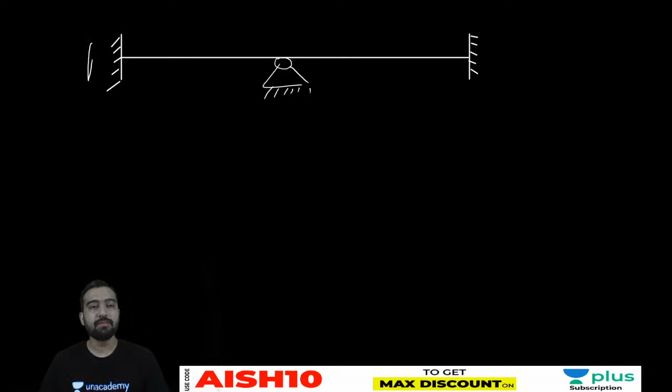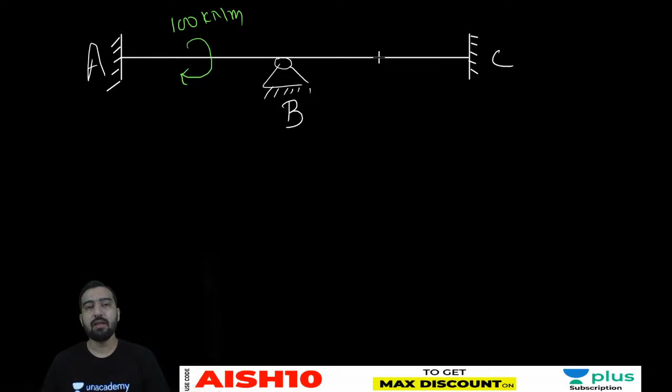Okay. A, B, C, and it is 100 kilonewton meter. It is acting at the center, and let's say it is... yes guys, one more thing.

Whenever I am giving you any problem, intentionally I am trying to take the easiest loading. Like you might have observed that I always put the load at the center, okay, UDL and entire span like that. But the fact is that in reality, in exams, such loading may not come. It may be UDL up to half span, it may be UVL and all.

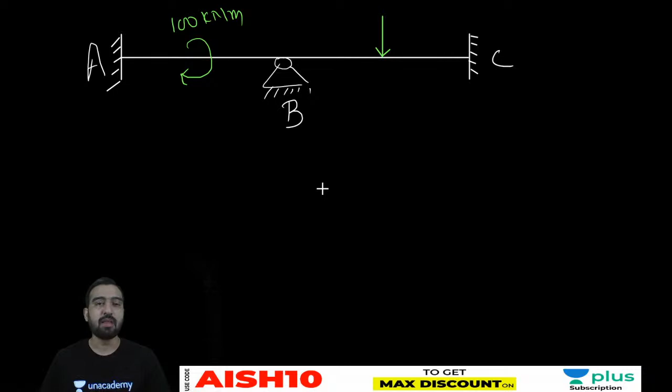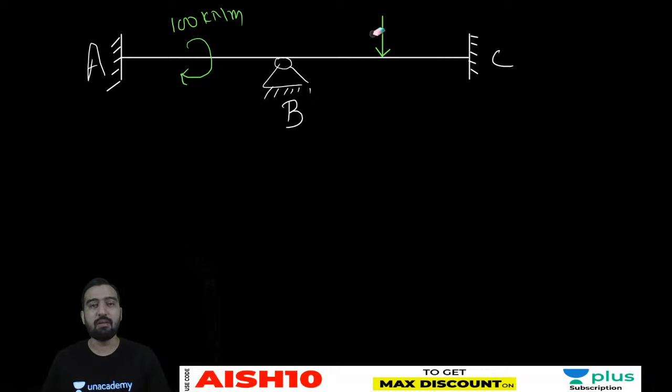But the impact of them is not going to create a problem, because whatever is the type of loading, based on that you can calculate the end moment. So my primary aim here is to deliver the concepts. That is why I am not emphasizing on load, because I know in the kinematic method, whatever loading you are applying, that can be easily tackled just by considering the fixed end moment due to that loading. And in the starting only, we have seen how to compute the fixed end moment for the various types of loading. So just to save your calculation time and all, I'm keeping the load simple.

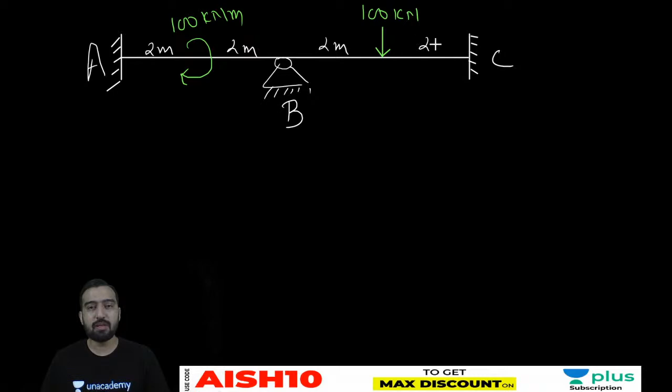So it is 2 meter, 2 meter, 2 meter, 2 meter. Let's say it is A, B, C, let's say it is D, let's say it is E. Okay, so these are the loadings. You have to analyze this beam.

And delta B is sinking by, let's say, 1 mm, and value of EI is, say, 48,000 kilonewton meter square. Okay, is it clear?

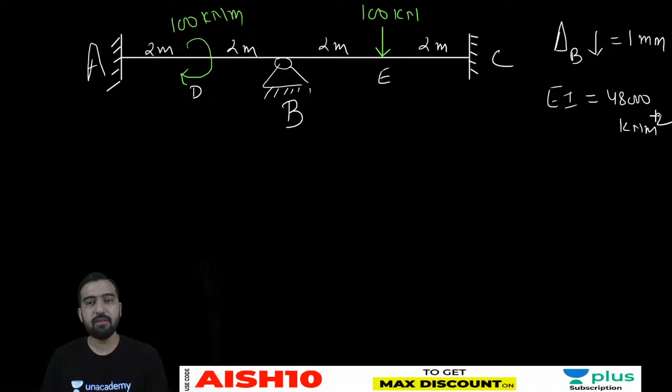So support B is sinking down, only support B is sinking down by 1 mm, and EI of the beam is given as 48,000 kilonewton meter square. Now you have to calculate the end moments, or draw the bending moment diagrams. Just give me the value of end moments. You can draw the bending moment diagram, I know, so just give me the value of end moments. What is MAB? What is MBA? What is MBC? And what is MCB? Is it okay? Please calculate this.

Okay, just let me check the 6 EI delta upon L square. Okay, all right. Yes, now calculate the value.

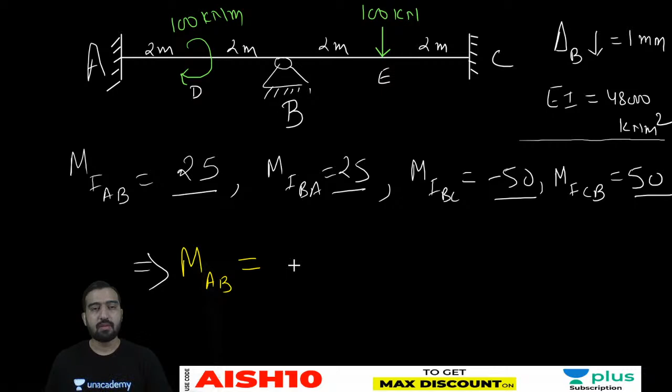my dear friends, let me tell you one thing very clearly. If you are able to write MAB, MBA, MBC and MCB properly, then nothing will be left in this question. Okay, my motive to give this question is only this, that how you can analyze this settlement, and are you able to decide the direction of the settlement, are you able to visualize the direction of the fixed end moment generated due to settlement. So this was my motto, okay, before giving this question.

So fixed end moment, will it not come due to delta? Yes, it will come, my dear friend, it will come. But this is the difference between the slope deflection method and the moment distribution method. You remember, in slope deflection method, the fixed end moment due to delta is to be considered separately. That is why the delta component is there, na, minus 3 delta by L or minus 6 EI delta by L square. You remember when we were deriving the slope deflection equation, first of all we only considered the effect of fixed end moment. After that we have seen the effect of rotation.

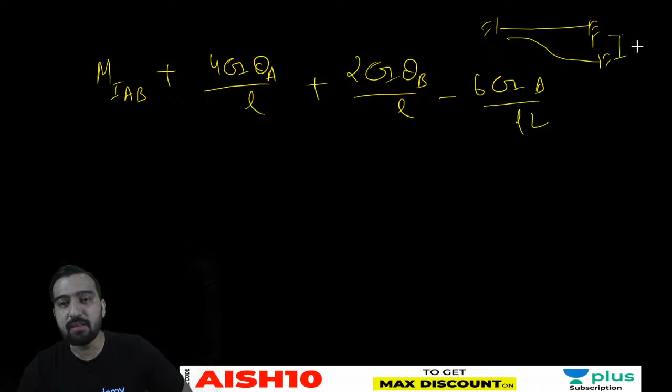After that we have seen effect of rotation at A only due to theta B, which was 2EI theta B by L. After that we have seen the effect of settlement delta, so minus 6EI delta upon L square. So here this settlement effect is being taken separately.

It is not to be merged with the fixed end moment. And if you guys think that you will be able to merge it with this, then you can do, no harm in that. But it will create problem while you will be analyzing sway problems and all. So you can merge it with him.

But if you want to write this general equation, that 2EI by L into 2 theta A plus theta B minus 3 delta by L. So this minus 3 delta by L into 2EI by L is nothing but the fixed end moment due to delta only.

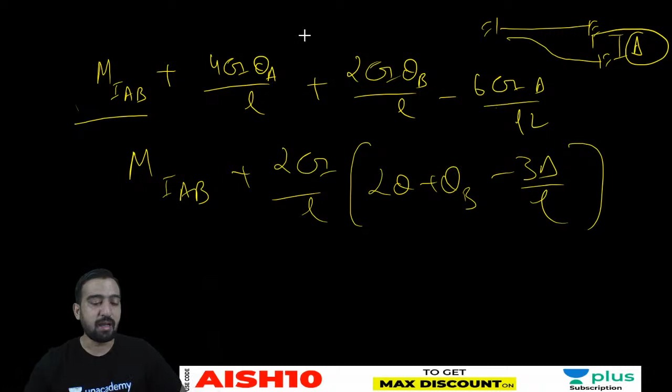Is it clear, Akash? So tell me, my dear friend, if it is clear or not. And see what is MAB. MAB will be equal to

25 plus 2EI by L, bracket: 2 theta A will not come, theta B will come, and 3 into delta by L.

My dear friends, tell me the direction of this term. Will it be positive or negative? Tell me which is right, all of you. I want to write MAB, and I am asking you which sign is to be considered here, positive or negative. Please answer me fast, I hope you got my question.

Positive, Mahima is saying positive, DK is saying positive. Akash is also saying positive. Mukesh is saying negative. I don't know why majority of you are saying it positive.

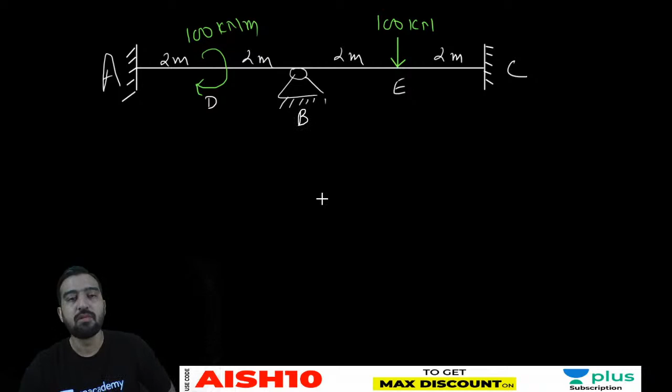Okay, now MAB is done. It is 25 plus 2EI by L, bracket theta B minus 3 delta by L. Now, my dear friend, tell me about MBA. It is MF.

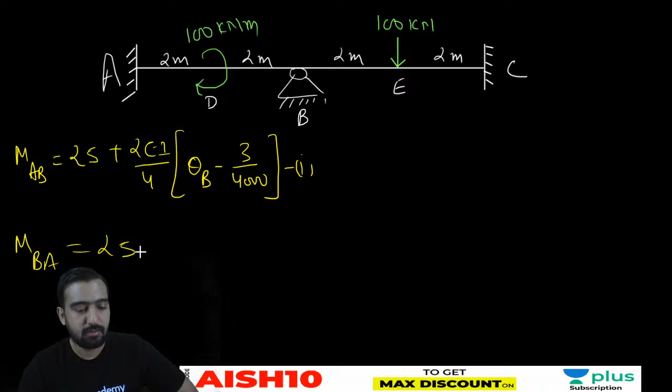No, Mukesh, final answer is not correct. Will it be negative or plus? Tell me. Will it be negative or plus?

Negative. Okay, good. Now, listen.

MBC equals minus 50 plus 2EI by L, 2 theta B, theta C will be 0. Will it be plus or minus 3 delta by L? Tell me. Plus or minus? Tell me. Fast.

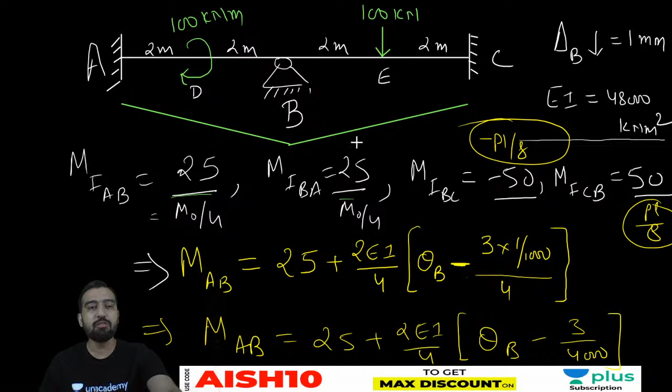Okay, MCB, how much will it become? 50 plus 2EI by L.

Now tell me, positive or negative? Theta B, minus or plus? Tell me.

So it will be, yes, positive. It will be positive. Okay. So MAB, MBA, MBC, MCB all are available here.

Yes. And what is the joint equilibrium condition? Joint equilibrium condition is that MBA plus MBC is equal to 0.

In actual conditions, only one unknown is here, theta B. Once the value of theta B is known to you, after that you can easily compute the value of MAB, MBA, MBC and MCB. Tell me, my dear friends, first, what is the value of theta B? Okay. And after that, the value of end moments.

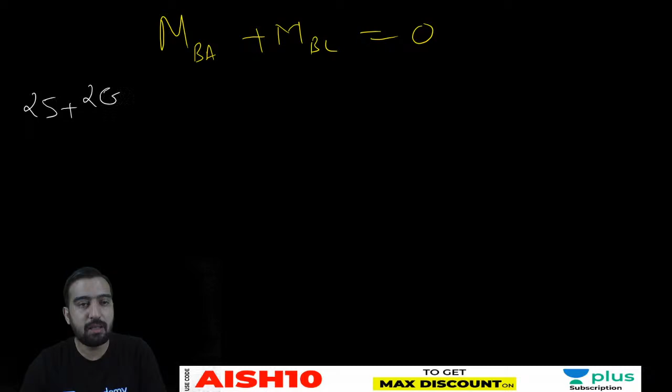So let me write the main equation, MBA plus MBC equals 0. So what is MBA? 25 plus 2EI by L bracket 2 theta B minus 3 delta by L.

1 by 1000, plus MBC. What is MBC? Yeah, now you are right, Mukesh. Now you are right.

Minus 50 plus 3 delta by L is equal to 0.

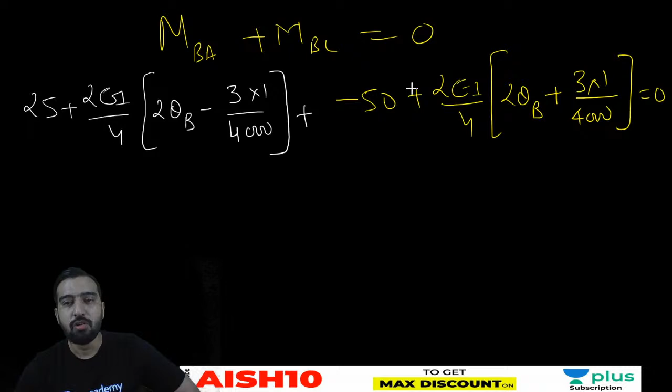So on solving this, you are getting theta B equals 12.5 upon EI. Okay, or you can even put the value of EI. It is given to you, it is 48,000, and on substituting the value of theta B and EI on these equations, you will be getting the final answer.

So it will be how much? 19.5, minus 19.5, sorry, it would be 19.5, it would be minus 19.5. Okay,

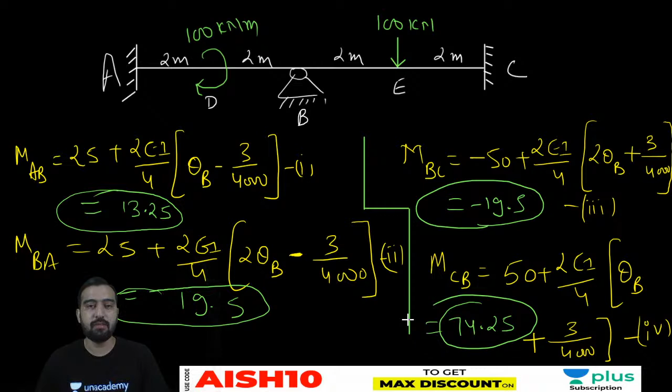Is it okay? So my dear friend, if you listen to this, okay, understand this, then I hope the effect of delta should not be there. Delta is not going to trouble you. Is it clear to all my dear friends?

Tell me. Please ask any doubt if you have any. Please ask the doubt if you have any. Okay. Is it clear to all? Tell me if you are having any doubt. Clear. Okay. Okay.

Sir, how do you calculate the value of MAB, MBA without the value of EI? Shashank, whenever there will be a problem on settlement, meaning where the value of settlement is known to you, in that case EI value you will be needing.

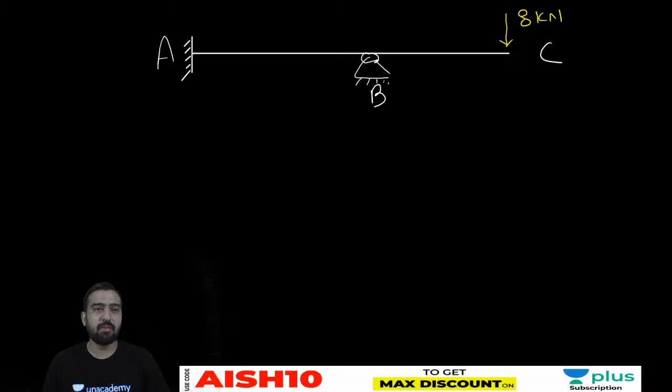Okay, so here E is 200 GPa, I is 5 into 10 raised to the power 6 mm4, and here the support B is sinking by 80 mm.

It is sinking by 80 mm, so it is the input. And you have to calculate the moment at A. Please use slope deflection method only. Is it clear to all?

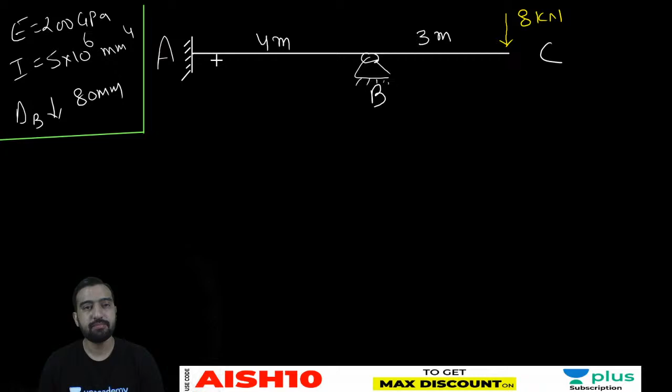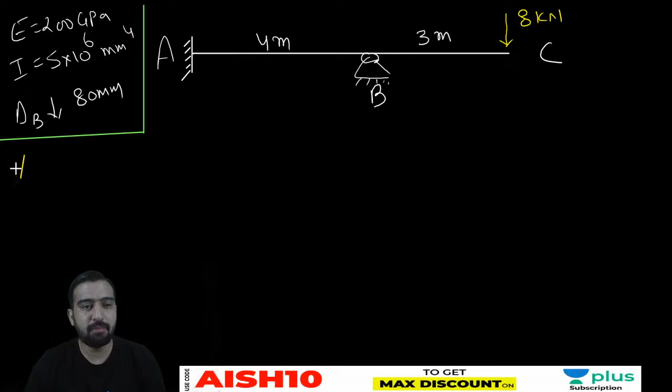Okay, don't plot BMD, SFD and all. Simply give me the value of MAB. But yes, you have to use slope deflection method only. You have to use slope deflection method only.

Okay, good, Shashi. Shashi is Sushma. No, Vivek. No. And Shashi, also give me the direction - is it clockwise or anti-clockwise? Also give me the direction.

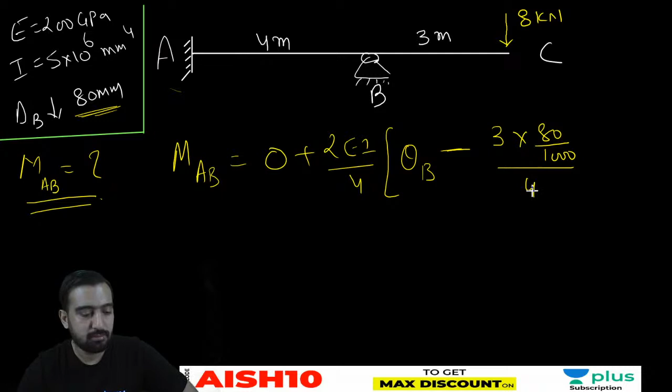What is MBC? Don't have to think, it is simply minus 24, isn't it? It is simply minus 24 because 8 into 3, so MBC will be anti-clockwise 24 - anti-clockwise I am representing with the negative sign. So no need to write theta, delta and all, it is an open beam. So directly you will be able to calculate the end moment at support B on the right hand side.

And from joint equilibrium condition, my dear friends, we all know that net moment at B is equal to 0. So it means MBA plus MBC is equal to 0. So what is MBA? MBA I can write as 2EI by L, 2 theta B minus 3 into 80 by 4000.

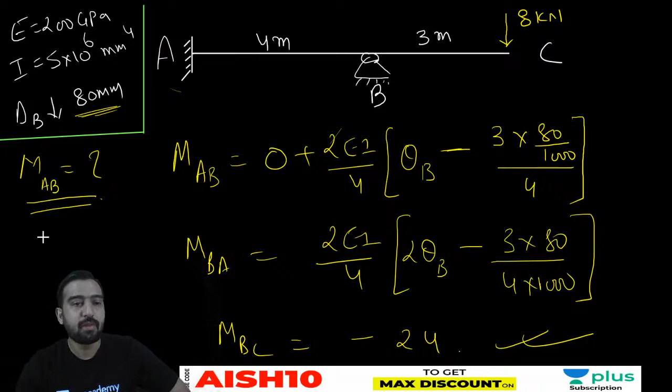Okay, first of all calculate the value of MBA. EI, what is EI? EI is 200 into 10 raised to the power 9 Newton per meter square.

Okay, or what can I do - it is nothing but 2 into 10 raised to the power 5 Newton per mm square, multiplied by 5 into 10 raised to the power 6 mm4. So what is this value? It is 10 into 10 raised to the power 11 Newton mm square.

So converting to kilonewton, dividing by 1000 three times. So it is only 1000, I think. Please check it - is it coming 1000 only?

Okay, Barvina, not an issue, thanks for the information. Today only I was thinking that now the live learners are going down. So I can understand the issue. But yes, if you have seen structures so far, then I will advise you to complete it. So anyhow, you can manage it and you can complete it. Good, thanks.

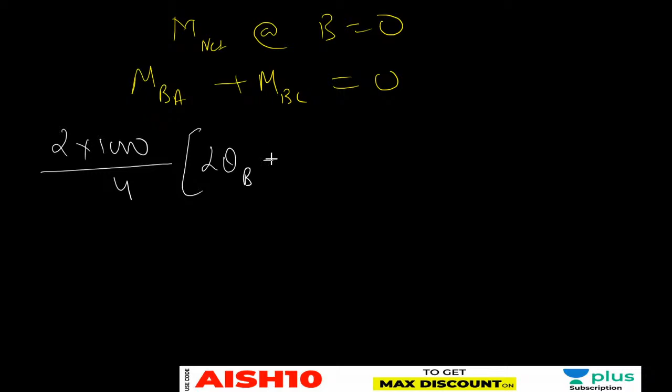2 theta B minus 3 into delta minus 24. Yes, now you can calculate the value of theta. So what is the value of theta? So 2 theta B is equal to 24 into 4 by 2000 plus 3 into 80 by 4000.

So just give me the value of theta B, my dear friends. What is theta B? What is theta B?

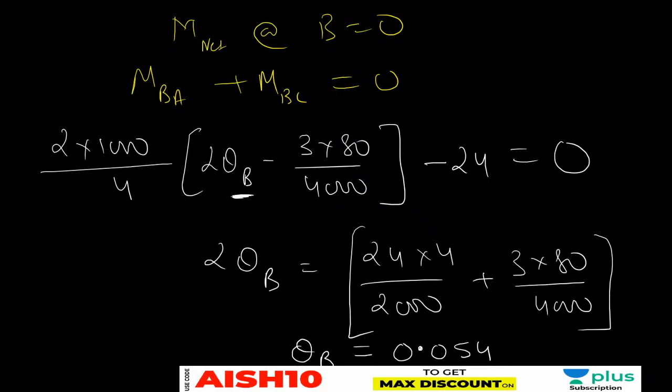But you are making use of this fact in order to find the value of this unknown value theta b. Okay, so MBA is 24, this we are knowing. So by knowing this information only, as you can see here, you are calculating the value of theta b. Is it clear to you, my dear friend? Okay.

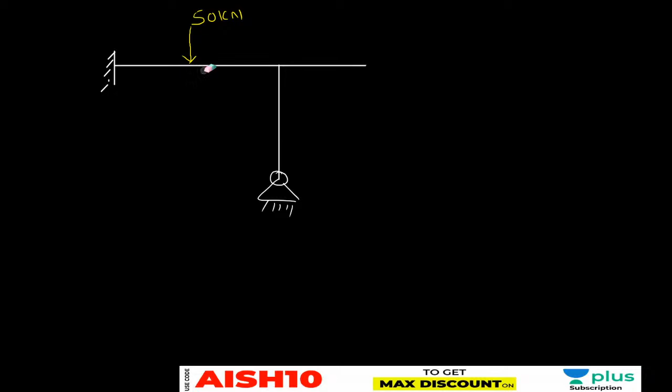Hmm, let's say it is 10.

So other than slope deflection equation, can we establish any relationship between moment at support A and support B? Not in this case, my dear friend, not in this case. Because here, due to the elastic curvature and all, you will not be able to find the exact relation between moment at A and moment at B. Okay, but yes, when we will be doing frames, then we will be able to maintain some relations. But that is also case specific, where loading should not be there, and the stiffness should be same. So after considering all those parameters you can make, but normally I will say no, don't try this.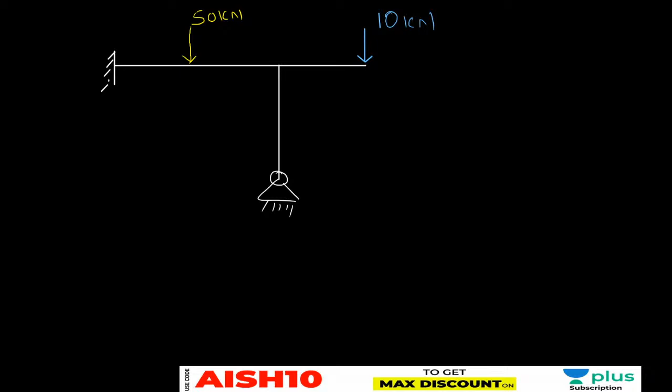Okay, but one thing is there, whenever we will be discussing a problem, then unknown variable will be increased by one more. So in that case, apart from joint equilibrium equation, you have to look for some additional compatibility conditions, and those additional compatibility conditions are shear equations, additional joint equations. That we will be seeing when I will discuss sway problems. Okay, so right now this is the loading.

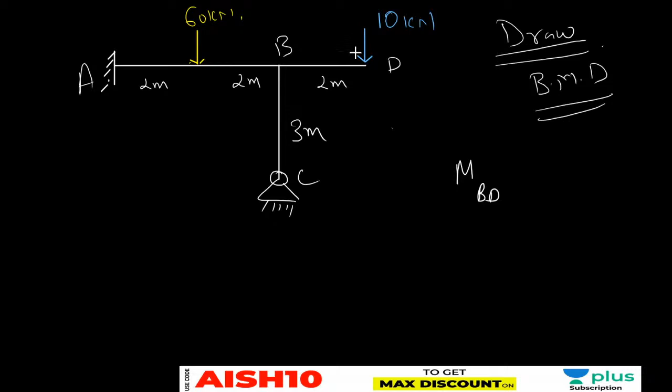MAB, MBA, MBD, MBC. Only one thing is known here, that MBD, it is sure 10 into 2, how much it is? Minus 20. This is known to me. What about MAB, MBA, MBC and MCB?

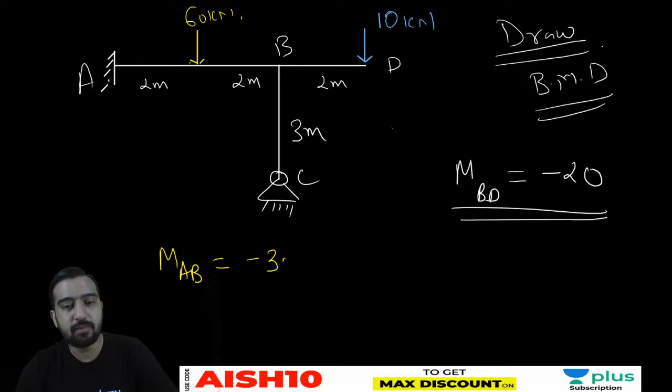See, MAB would be equal to how much? 2EI by L, sorry, PL by 8. So what is PL by 8? Minus 30. Now please don't ask how I got minus 30. PL by 8, 60 into 4 by 8. Okay, minus 30 plus 2EI by L, plus 2EI by L, bracket 2 theta A. Theta A is not required. So theta B, no delta is here. This is my equation number, relation number 1. Okay.

MBA, 30 plus 2EI by 4 bracket 2 theta B. Okay, this is the relation number 2. Now MBD you know already. So let me come for BC. MBC.

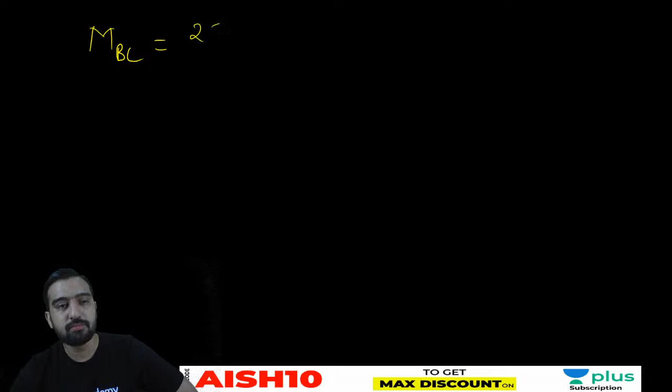So MBC would be how much? Yes, good. It is 2EI by L, bracket 2 theta B plus theta C. Isn't it? 2 theta B plus theta C.

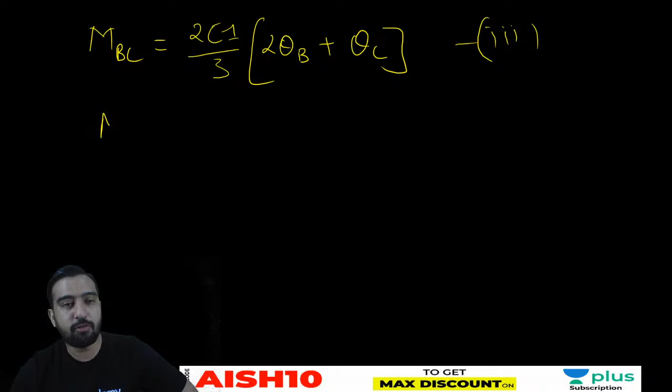Okay, so relation number 3. And relation number 4 is 2EI by L bracket theta B plus 2 theta C. This is my relation number 4.

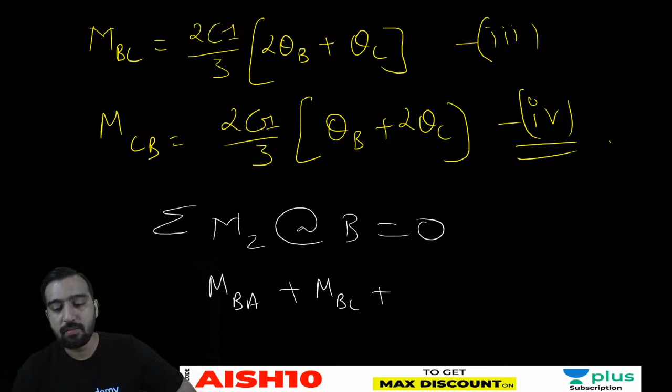Summation of Mz at joint B is equal to 0. It means MBA plus MBC plus MBD is equal to 0. Isn't it?

Not 2 pm, 3 pm. 3 pm there is a SOM class. Not class, it is a session on MSQ. It is the session on MSQ. Okay.

What I was telling you - yes, MBA plus MBC plus MBD is equal to 0. MBA plus MBC plus MBD is equal to 0. Okay.

So after that, solve this equation. So MBA is how much? 30 plus 2EI by 4 into 2 theta B. Okay, plus

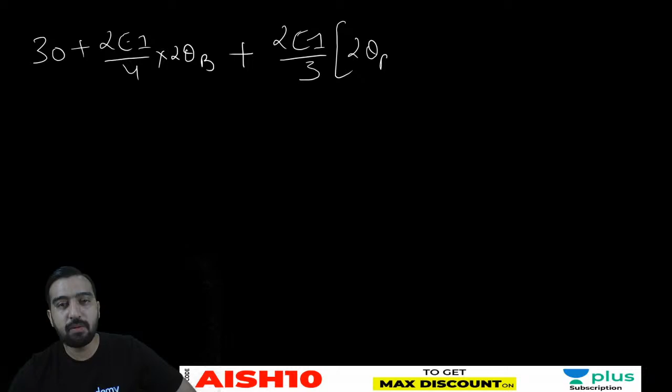BC, 2EI by 3, bracket 2 theta B plus theta C. 2 theta B plus theta C. Okay, what is MBD? MBD was equal to minus 20. Minus 20 is equal to 0.

But see, my dear friend, this equation is in two variables. Yes or no? Tell me, my dear friends. So this is the equation in two variables, so alone we cannot solve it. So my dear friends, I will be needing here one more condition.

Okay, and what is that condition? You all know, what is that condition? What is going to be the second? Yes, Akash, second equation you all can see. As you can see that this hinge support is at this.

What is writing? Sir, here is the slope deflection equation, everywhere we are using clockwise moment as positive. Yes, exactly, because while I derived the slope deflection equation, at that time only I considered all moments to be clockwise. That is why, until these magnitudes are known to you, you have to assume them clockwise. And once the magnitude comes negative, in that case you can reverse the direction.

Okay, so my dear friend, here the second equation is that moment at C - you know it is a hinge support, so here moment will be equal to 0. So MCB here is going to be equal to 0. So the second equation would be

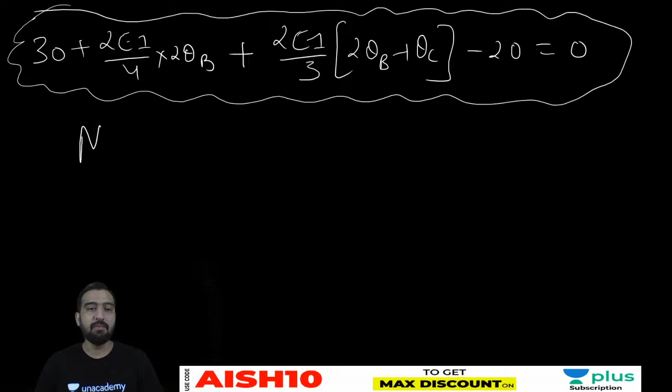MCB is equal to 0. And what is MCB? So MCB I can write from here: 2EI by 3 bracket 2 theta C plus theta B is equal to 0. So from here it is nothing but simply equal to half of the rotation at B. So rotation at C is half of the rotation at B. Okay, is it clear to all my dear friends?

So now you will be able to solve the value of theta B or theta C, because theta C and theta B can be related by this relation, and after substituting the value in this equation, you will be able to calculate either theta B or theta C. Once the values of theta B and theta C are known to you, you have to simply place those values in your equation and you can find the result. Okay my dear friend, please solve it.

Just give me a 1 minute break.

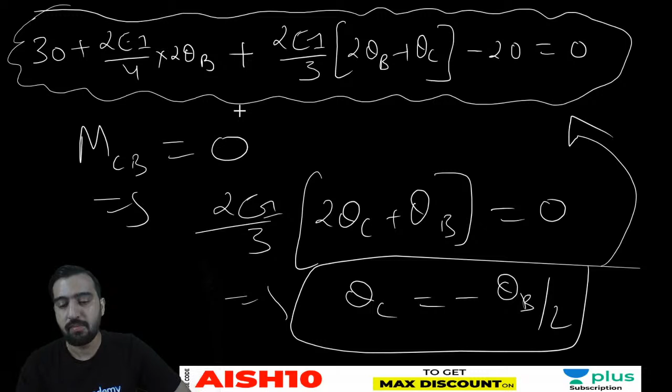Shashank, please give me the final answer. Please give me the final answer. Vivek is saying minus 10 by EI. Shashank is saying 5 by EI.

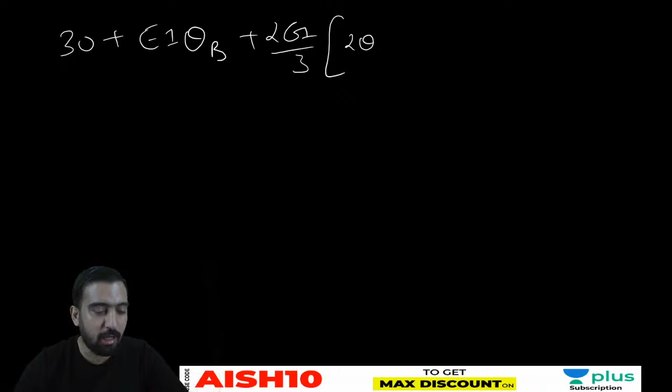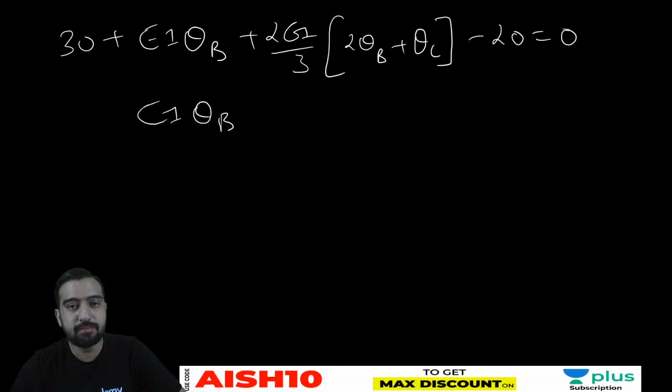So EI theta B plus 4EI theta B by 3 plus 2EI theta C by 3. 20 minus 30 minus 10, and this becomes 3 and 4, 7, so 7EI theta B by 3 plus 2EI theta C by 3. There, a fifth different answer - that's what I was afraid of.

मुझे लगता है छठा मैं निकालता हूँ, रुक जाओ। थीटा सी हो जाएगा माइनस थीटा बी बाय 2।

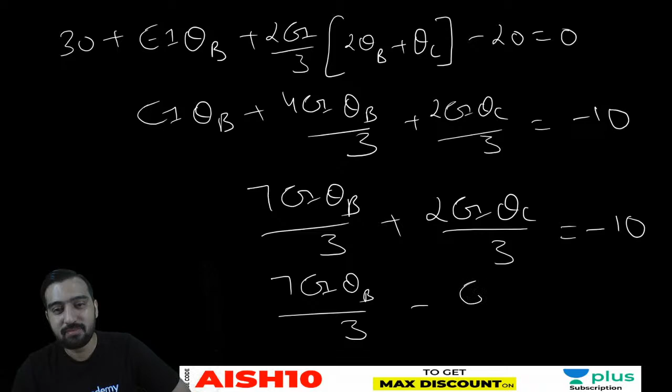6, 30, 30 by 6, yes, 5 is right. So 5 upon minus 5 upon ei, in fact it is minus 5 upon ei, है ना। 7/3 माइनस 1/3, 6/3, 2, 2, 10, 10/2, 5, ठीक है। It is coming minus 5, please confirm my dear friends, it is coming minus 5, not plus 5। महिमा हद मचा दी भाई आप लोगों ने। आगे से जो सॉल्व क्वेश्चन है वही कराऊंगा, रैंडमली क्वेश्चन नहीं दिया करूंगा।

ओके, ठीक है। -32, चलो देखते हैं। -5 अपॉन ई आई, नाउ सब्स्टिट्यूट दिस वैल्यू। अच्छा थीटा सी कितना आएगा?

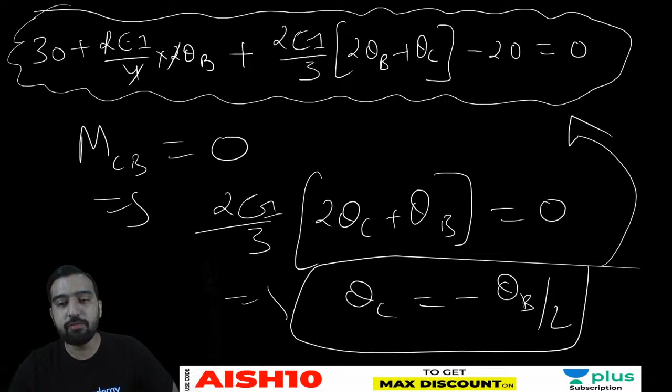If theta b is -5 upon ei, in that case theta c would be clockwise. So here theta c would be clockwise and it will be 2.5 upon ei, positive. Okay, now substitute these values in the original equations.

Tell me these values one by one. So I am writing the final value with the blue. So it is -5, 2.5, yes, -32.5. एक मिनट रुकना, एंटी क्लॉकवाइज, क्लॉकवाइज, एंटी क्लॉकवाइज, एंटी क्लॉकवाइज, yes, very good.

-32.5 is absolutely right. It would be how much? 25. Okay, very good. And MBC would be equal to

-5. It is 25, na? What is the direction? Clockwise. And MBC would be equal to -5, I guess. Isn't it? MBC would be equal to -5 and it is equal to 0. Yes. Great. Great.

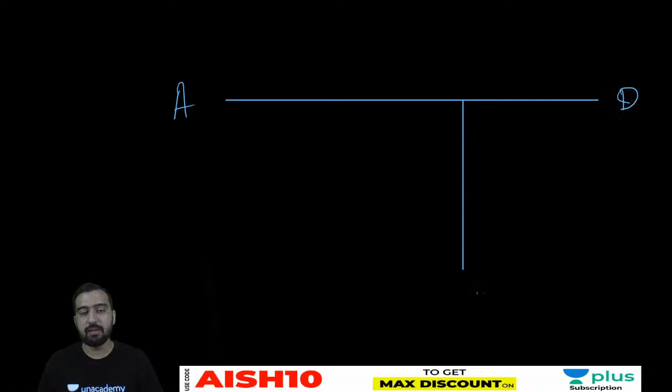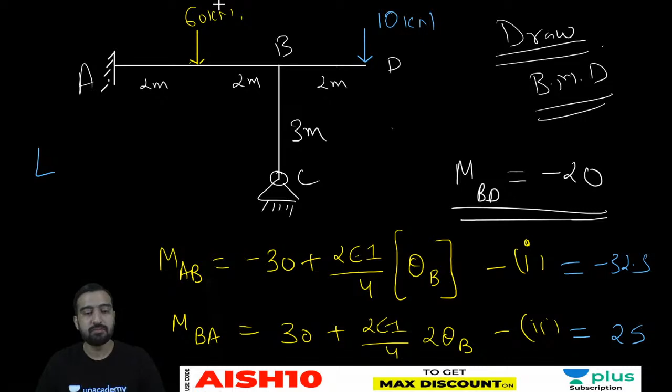So let's say it is A, it is B, okay, and it is C. I'm sorry, that is D, and that is C. So first of all we know rule left right. लेफ्ट में एंटी ऊपर होता है, लेफ्ट राइट, लेफ्ट में एंटी ऊपर, राइट में क्लॉक ऊपर, है ना। लेफ्ट में क्लॉक नीचे, राइट में एंटी नीचे, and this is negative area, this is positive area.

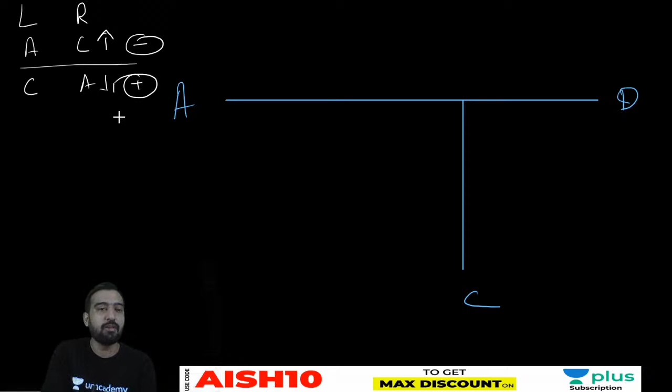Okay, and this negative positive we are defining in the reverse order just to keep our negative diagram and positive diagram on same phase. And if we are keeping negative and positive on same phase, then very easily we will be able to identify that in a particular portion, in a particular span, who is winning, positive is winning or negative is winning. If positive is winning, then sagging is there. If negative bending moment is winning, then hogging will be there. So that is the concept there.

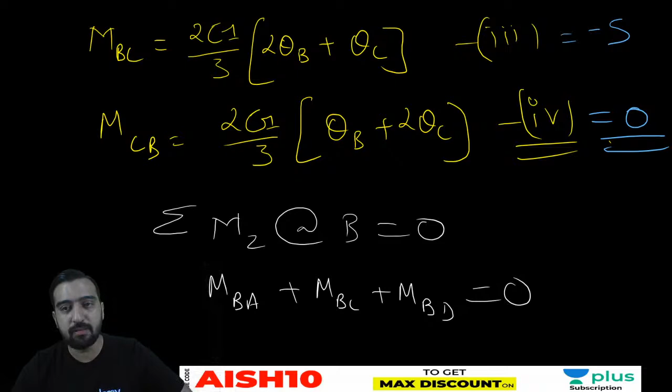So at A there is a minus 32.5. So left anti-clockwise, how much? It is going to be like this, 32.5. Okay, so left में anti-clockwise आता है ऊपर, so I am making it ऊपर. Okay, and what about right? So moment at right would be clockwise and 25. Okay, so right में clockwise ऊपर बनाएंगे, राइट में क्लॉकवाइज ऊपर बनाएंगे, okay. So bounded area is above the reference and it is actually negative,

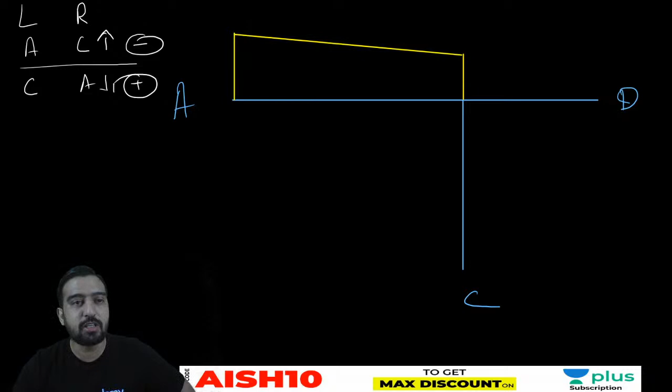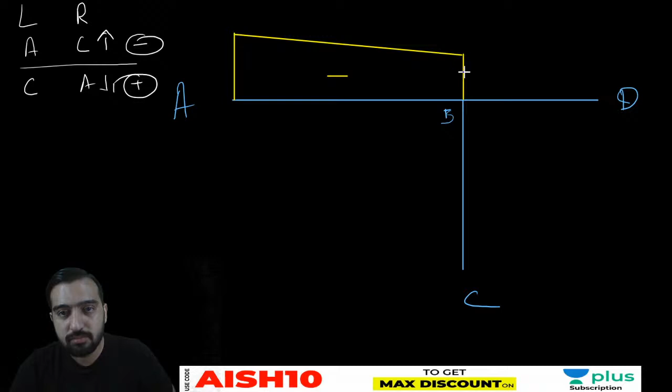and after that, see this value is B, B पे आपका आ रहा है -20. Okay, so I am using a different color code for this, so -20. Okay, and here it is 0. So above the reference, so it is also negative. B, C. B is left and C is right. B is left and C is right. Okay.

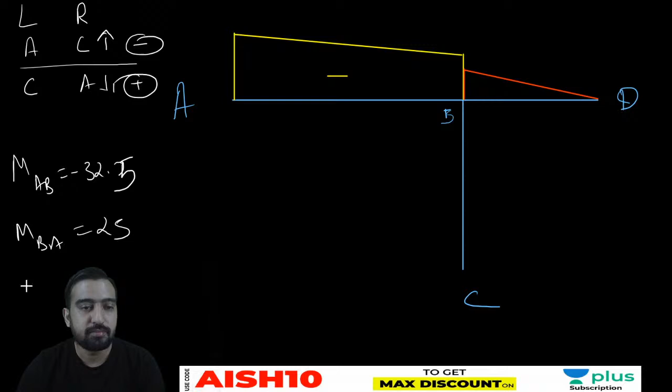So A, B, left, right. Left anti-clockwise, I am drawing it upside. Right clockwise is above the reference. And if the area is above the beam member, then it is negative area.

Okay, now come to BD. BD, left, right. B is left, B is right, D is right. It is -20 above the reference because it is anti-clockwise on the left hand side, and anti-clockwise on the left hand side is above the reference. It is 0, so I am drawing it like this.

Now BC, B is left, C is right. This is above, this is below. So B is -5. So for left, anti-clockwise will be on the top side. So I am going to draw it like this with green.

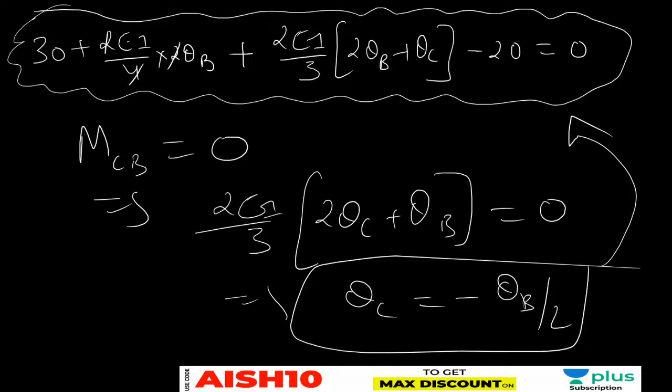And due to the 60 kilonewton load, guys, you can easily calculate the bending moment diagram. So due to 60 and due to the span of 4 meters, you can say it is PL by 4. So what is PL by 4?

P into 4 by 4, so it is 60 only. Plus 60, I guess. 30 into 2 is 60. Yeah, it is 60 only.

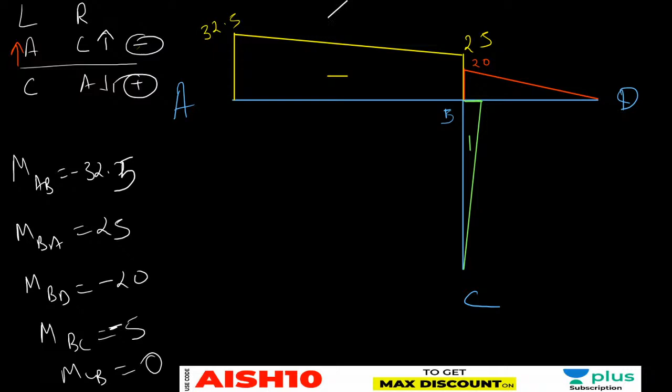So that I am going to draw with white. So this is now 60. So now you can see this is the bending moment diagram. It is negative, it is positive, it is negative, it is negative, and it is negative.

Meaning you will be having these two contraflexures here, one here and one here. So on these two portions you will be having contraflexures, and only this much portion will be in sagging and the remaining portion will be in hogging.

This will be in hogging, this will be in hogging, this will be in hogging, and this will be in hogging. Upper fiber tensed, upper fiber tensed, upper fiber tensed, and upper fiber tensed. Only in this much segment, my dear friend, you will be having sagging bending moment.

And what is the magnitude of this positive bending moment? So anybody can tell, it would be how much? It would be 60

minus, 60 minus the average of 32.5 and 25. You will be able to get this positive value of the bending moment. Is it clear?

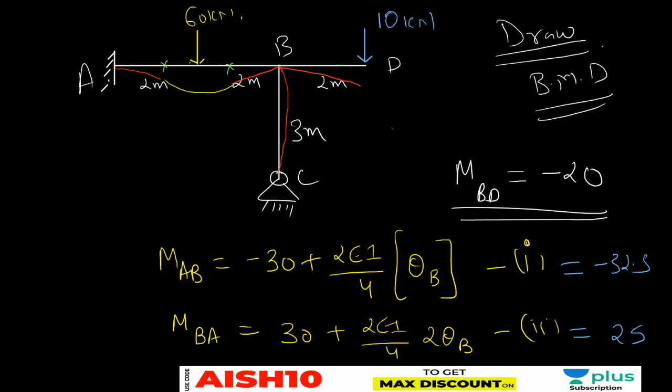So now my recommendation is to solve it with the basic method. You know the basic method? Separate these three members, calculate the internal forces, calculate the vertical component of forces, horizontal component of forces and all, and then draw the bending moment diagram. Really, you are going to enjoy that process. Once you are comfortable in that, these will be addictive problems for you. I am quite sure you will leave your other important tasks and practice these questions once you are comfortable making the free body diagrams of these individual segments. Is it clear? Okay, great.

So tomorrow we will be discussing some more good problems.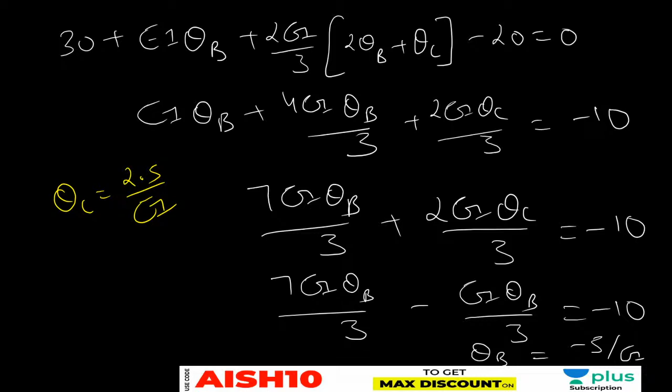See, this is my joint. So from here it is 25. From here it is anti-clockwise 20. Then from here it is 5 only. So you can see the net joint is in equilibrium. You can see here the net joint is in equilibrium. And just see, if this is the member and if it is clockwise, then you can say it is clockwise, so it is already hogging. So you can see it is already hogging with 25.

Yes, this trick you can use in all the frames, all the beams. Doesn't matter whether you are getting these end moments from slope deflection method. Even in moment distribution method, you will be able to use this trick. As long as you know the end moments, you will be able to solve this problem.

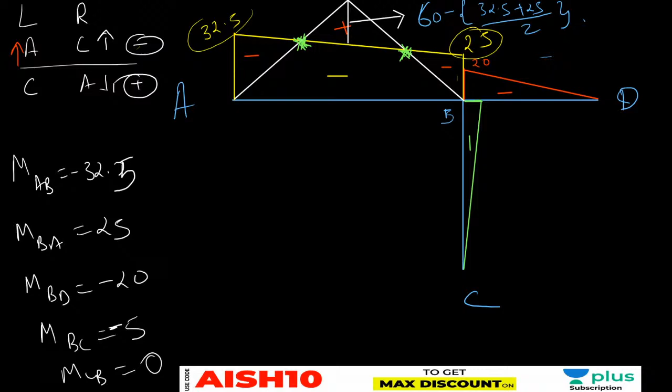And Himanshu Gupta, tell me my dear friend, is this doubt clear to you? It should be 25 only. It should be 25 only. Is it okay?

See, my dear friend, it's like this.

And those who are asking the timing of the special class, for them let me tell you that it is at 3 o'clock.